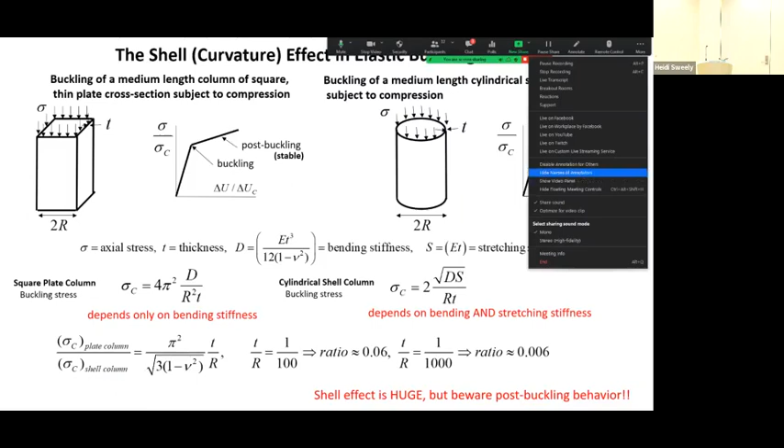I want to talk about the shell effect. These two examples show it: on the left is a square column constructed of thin plates. This talk is all about elastic buckling. On the right is a cylindrical shell with the same width, diameter of 2R, and the same thickness as that square column cross-section. They're both subject to axial compression, and for the purposes of discussion, imagine they're both clamped at both ends.

We're not talking about Euler buckling here. This would be typical of a shell with an aspect ratio of length to width like you see in those examples.

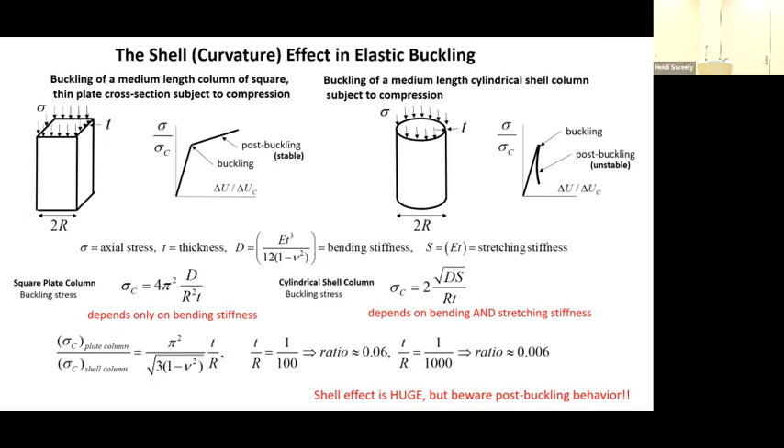If you look below the square column, the analytic formula for a perfect square column gives the stress at buckling, and it involves the radius to thickness ratio, but only the bending stiffness. Buckling in plates, at least at the onset, involves only bending. D is the classic bending stiffness of a plate or shell of thickness T, and nu is Poisson's ratio.

On the right-hand side, the corresponding formula for essentially the same sized column, but cylindrical, involves both the bending stiffness and the stretching stiffness.

The key point is that buckling in a shell—and this is the essence of the shell effect for buckling—can't take place without both bending and stretching.

As everybody knows, I will demonstrate this—even I can do these kind of experiments. A thin plate or shell is very easy to bend, but amazingly stiff in stretching.

So the shell effect is the fact that buckling can't take place without both bending and stretching coupled together. If you look at the bottom of the slide on the left, you see the ratio of the plate column stress at buckling to that of the shell, given by that simple formula. It involves only the thickness to radius ratio.

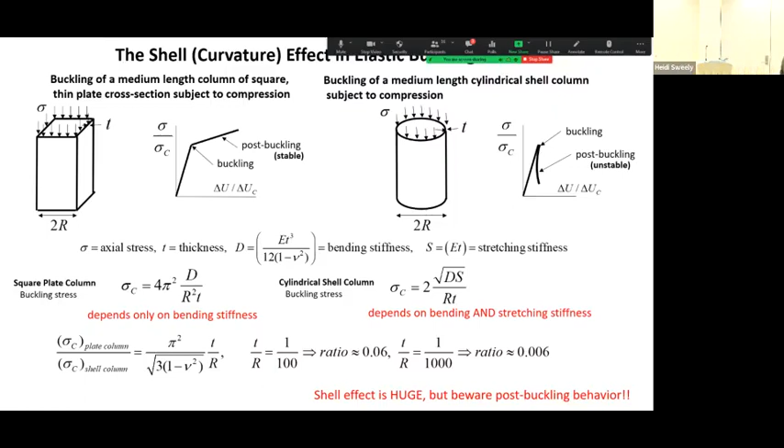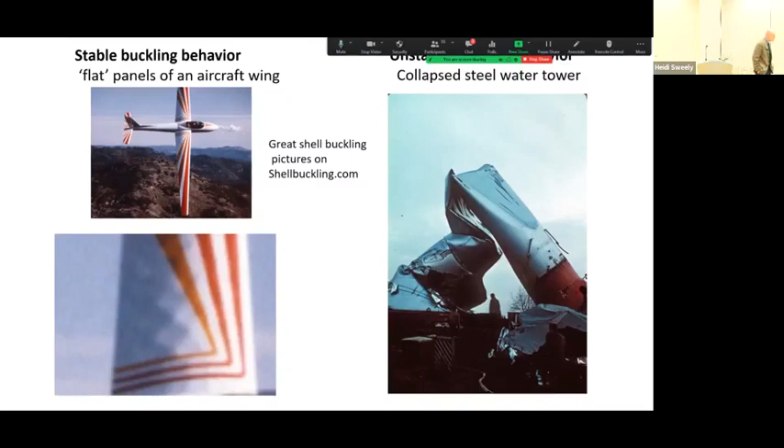In fact, the old metal airplanes, I think maybe even back to DC-3s, were designed to fly under certain conditions with buckled skins because it allowed for more load carrying capacity. For aerodynamic reasons, that's not allowed anymore. The structure on the right—I don't need to say anything about it—is a water tower that buckled and just immediately collapsed. You're going to see other examples of this.

I couldn't resist including this very nice experimental paper by Marc Meyers and some of his students at UCSD.

They tested various eggs, from a quail egg up to an ostrich egg. Notice that for a typical chicken egg in this test, these are loaded in axial compression, but carefully without concentrated loads, distributing the load instead. So that's actually an axial load. You can see that a typical chicken egg can take about 1,000 newtons, in other words, more than 200 pounds.

You can try this yourself. If you take an egg in your hand, I suggest making sure you don't have a good suit on, and squeeze it. As long as you don't press too hard on one spot, you can't break the egg. By the way, they repeated these tests for eggs with the interior evacuated, and there's a little difference, but not much.

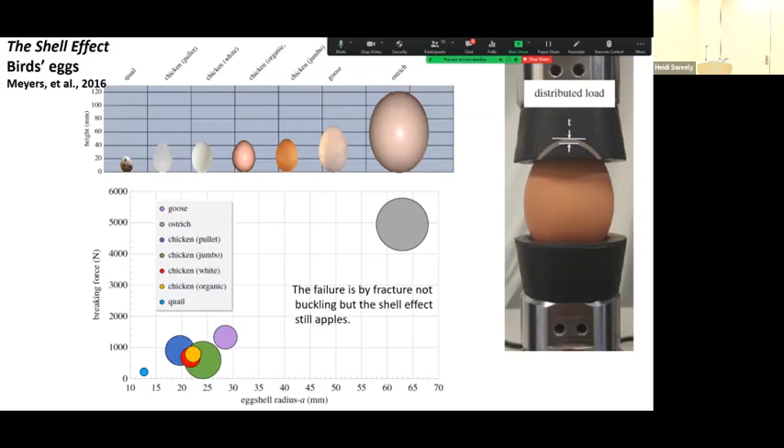Now, I should hasten to say these eggs do not fail under this loading by buckling, but they're taking this load, they actually fail by a compressive failure mode. But again, that is the shell effect. If chickens laid square or cubic eggs, they wouldn't work so well.

Okay, let's get down to work. There's going to be a little history here. For those of you unaware of this, back in the 60s, when NASA was working flat out on shell structures, they collected data, and this is just for cylindrical shells under axial compression.

By the way, this is all elastic buckling data. They collected data for design purposes, and the key thing this data brings out is the key thing about this unstable buckling behavior of shells.

So let's start with that data plot. On the horizontal axis is the radius of the shell divided by the shell wall thickness. Thin shells often have R to T ratios of over 1,000, but that data goes down to R over T of a bit less than 100. The material has to have a pretty high yield strain if it's going to buckle elastically at an R over T of 100, but these shells have.

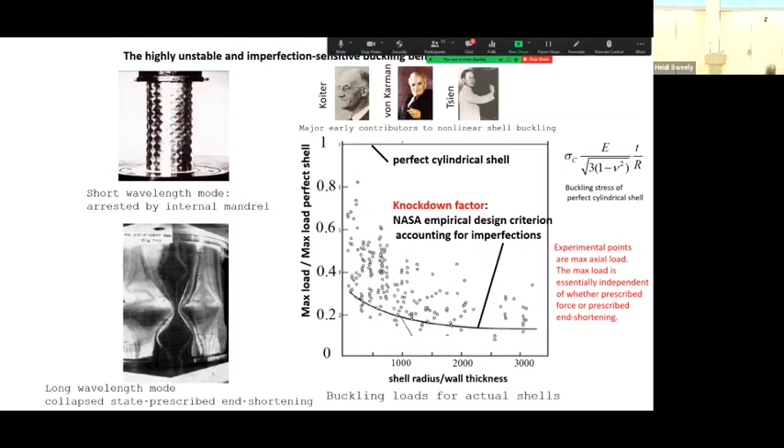But the thing to take notice of here is that some of these shells were manufactured so carefully—a few of them, even way back, there was a group at Stanford that did electroplating of shells on very carefully machined wax subsurface. They electroplated these shells, polished them, and then melted out the wax. They could make very accurate shells, and you can see some of them buckled up close to the classical value, but still enormous scatter. As I say, still today for unstiffened spherical or hemispherical shells, we still use that factor of 0.2 knockdown.

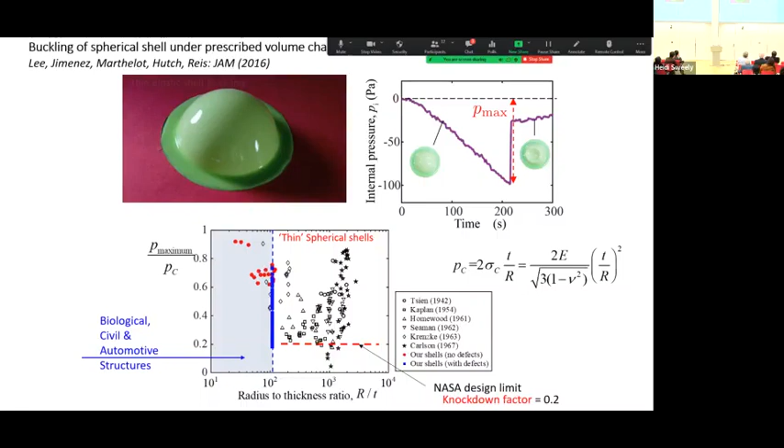Another point before we move on: most of my talk is going to feature spherical shells, but not entirely. There's tremendous interest now, which was not the case in the 60s and 70s, in the life sciences and soft materials area. The coronavirus is a spherical shell, radius on the order of tens of nanometers. There's lots of interest in chromosomes, colloidosomes—they come out to be nice spherical shells. They buckle. There are other examples.

By the way, in the late 70s I did consulting work for General Dynamics on a tank for one of these liquid natural gas tankers, which are very much in the news these days for obvious reasons. You've probably seen these ships—they typically have 4 or 5 of these gigantic spherical tanks. They're made out of aluminum, and that's because, for the material scientists in the crowd, it's a cryogenic cargo—you don't want to use steel.

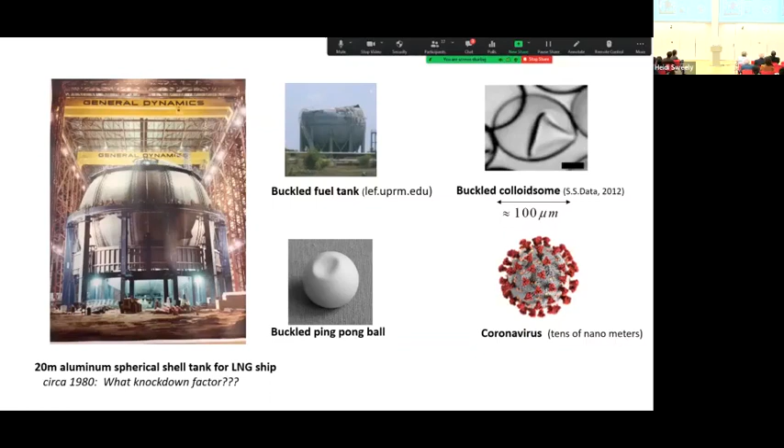It's not obvious, but the reason I was a consultant is that the thickness of the shell has to be designed so that it doesn't buckle. So the question is, for this type of loading, what was the knockdown factor? That's the role I played in coming up with one.

Okay, so here's the way my talk's going to play out from here on. I'm going to spend a little time talking about the way we analyze—I'm not going to do any details, but what has come out recently about very accurate analyses, most of it numerical. I'm going to drive home this issue of buckling under, for spheres, prescribed volume change or prescribed pressure, because that's part of the picture. I'm going to talk about imperfections, imperfection sensitivity, and computing knockdown factors.

Very recently, and here's where some of the younger people are going to be featured, I'm going to talk about energy barriers and probing methods for experimentally understanding elastic stability. And then finally, I'm going to talk about some things that really could also fall in the area of nonlinear dynamics. I know you guys have a number of nonlinear dynamics experts here.

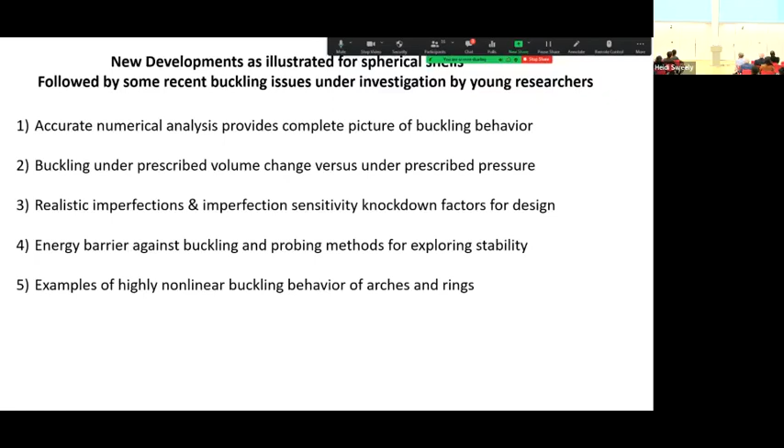Okay, let me start with this. I don't want to dwell on any of this at length, but I'll just mention and give you an idea.

One of the things we could not do in the 60s—remember finite element methods were in the beginnings, and certainly for nonlinear shell analysis, finite element methods were just starting to emerge. Even for nonlinear ODEs, the finite difference methods people were using could not do this kind of thing, at least not well.

What you see here is the result of a shell theory that uses exact bending and stretching measures. It is small strain, so it's linear elasticity for the material part—the strains are small in these problems, it may not be obvious, but they are. What makes this nice and easy is that for spherical shells, most of the nonlinear behavior can be captured quite accurately, at least qualitatively, by looking at axisymmetric behavior. So for these results we don't need PDEs, we're dealing with ODEs, and everybody who works with numerical analysis knows there are very powerful algorithms for solving nonlinear ODEs for problems like these. I use IMSL, but it's just one of many softwares.

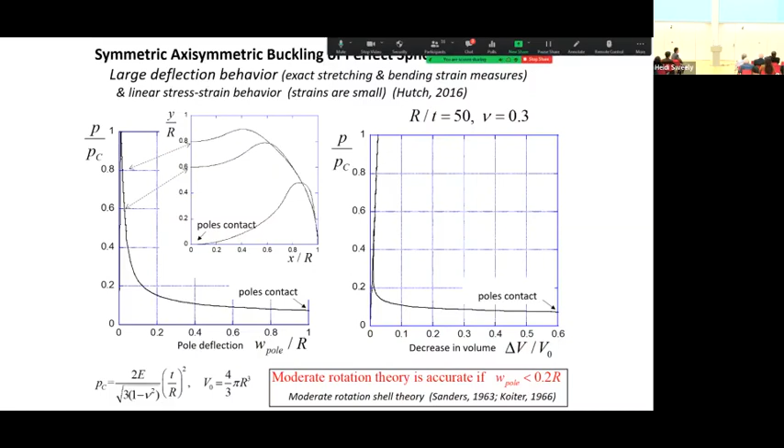That's way beyond anything we're interested in, but this demonstrates just how incredibly nonlinear the post-buckling behavior of these shells is. It also tells us—it's not obvious on this slide—that if you use the shell theory called moderate rotation shell theory, developed by Sanders and Koiter in the 60s, it is very accurate for pole deflections less than about 20% of the radius, for all values of R and T.

Okay, let's do this—I'm going to show you this picture again, but before I do, let me tell you what we're seeing. As I said, this is prescribed volume. The Reis group uses a syringe. By the way, these shells are only about this big—this particular shell has a radius-to-thickness ratio of 79, they're only about that size. Through the bottom, they remove water with a syringe, so they're controlling the volume.

So what we're going to see is we go up to point A—that's where it buckles. This was a nearly perfect shell, buckling at 80% of the classical value. Because the volume is prescribed, it snaps at the same volume down to B. Then, as I mentioned earlier, they continue removing water and it goes out along this stable post-buckling curve, down below 20% of the load-carrying capacity of the perfect shell. They go way out here, and then they bring it back—it gets back to point D, and then it snaps back to the perfect state. So let's do that once more.

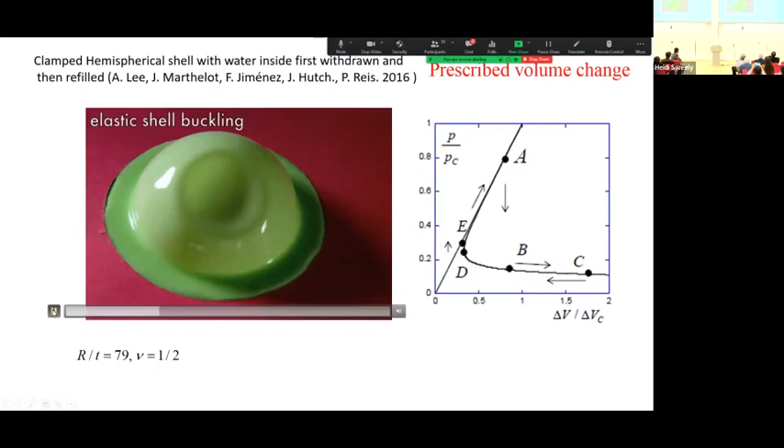One thing you may ask: how can it buckle under constant volume with a dimple? Because that's going to decrease the volume. The reason is that going along with this is that the pressure drops dramatically, by a huge amount. That means the shell, which has deformed elastically, allows all the other part of the shell to expand outward. So the volume you lose from the dimple is replaced by the expansion of the shell that way.

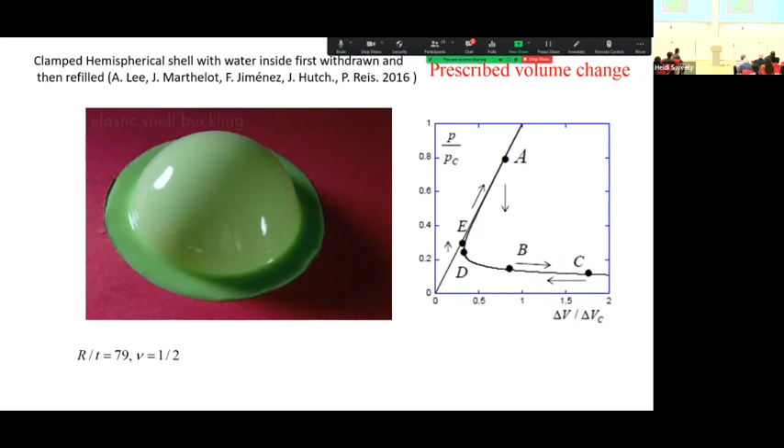Now let me show you what happens. By the way, Joel Marthelot, he was in the group. He did this especially for this lecture for me at my request, just a week ago.

So this is under prescribed pressure, right? And what does it do, think about it. Again, it's the same shell. We get up to A, it buckles. The pressure is held constant. Where can it go? Well, let's look.

This is equivalent to when you stand on a beer can and it buckles. And as you know, when it buckles, it just flattens.

These are elastic, so they spring back, and you can test them over and over, which they've done.

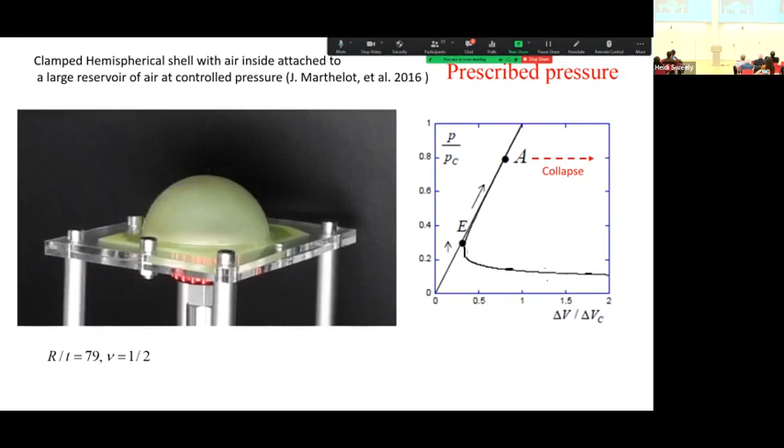Just let you read this. This is a beautiful test. Just so you know, this is a tank car with about more than a centimeter thick steel.

And I'll tell you how it's loaded after you see it.

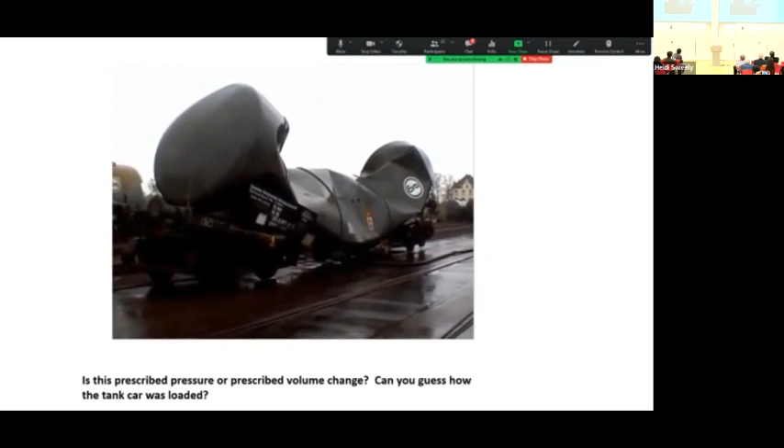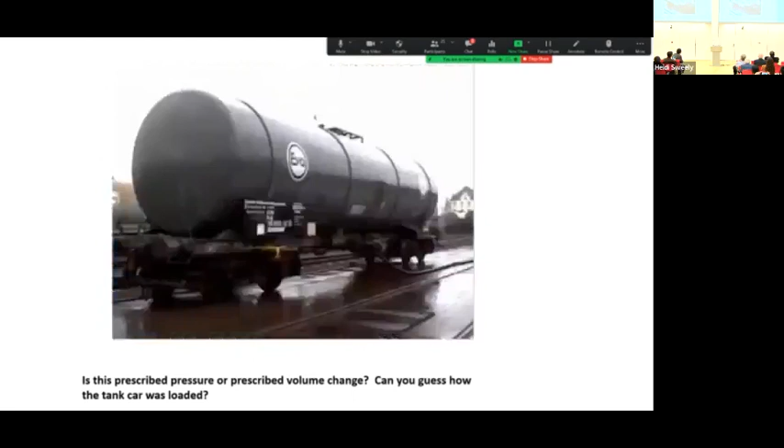What they've done there was done deliberately, but this is real. This is under prescribed pressure. What they've done is they filled the tank car with water and sealed all the valves. Normally when you evacuate a tank, you have to open a valve at the top or you're asking for trouble. They don't do that. And I don't know if you noticed, but there's a hose at the bottom, so the water is drained out from the bottom. I'll just state as a fact, even though this is a half-inch or almost half-inch thick steel shell, it buckles at about half an atmospheric pressure.

So by the time the water in that tank is about half down, boom, catastrophic. I'll just remark that the cylindrical shell under hydrostatic pressure is not as catastrophic as the cylindrical shell under axial compression.

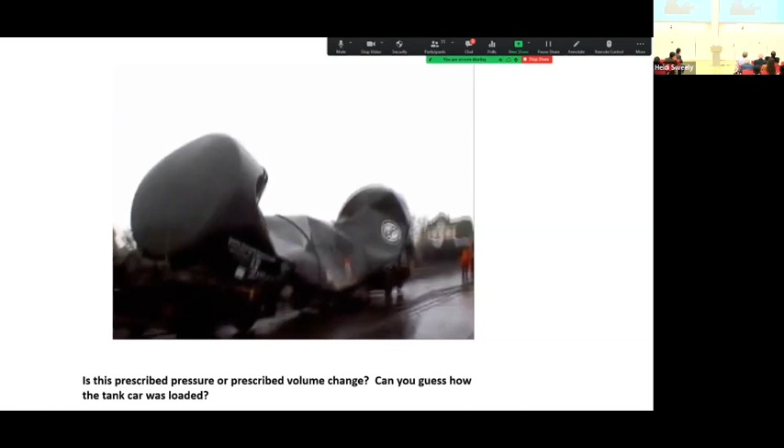Okay, you know, I'm not going to spend time on this, but Stu Antman's here, so I'll let him just look at that for a second. So the thing, again, that was not possible in the 60s, I want to make the point.

Koiter, he was my hero in mechanics, a Dutchman. He wrote basically his last important paper, a 100-page paper on the buckling of spherical shells. It's a real tour de force, but there were so many things he could not do because he was working only analytically.

But with numerical methods, with great accuracy, you can ask all kinds of questions and get all kinds of results. I'm not going to dwell on it, but one of the interesting things is that this shows that as soon as, and this is what the analysis - a graduate student who's good at numerical analysis, once he gets the equations right, can do these calculations.

But what this shows is that as soon as the shell starts to buckle, this is the classical mode at the bottom here, derived by a Swiss, I think, named Zoelly in 1915. As soon as it starts to buckle, that shape gets lost and it becomes a localization problem - the buckling localizes to the pole, immediately. It's amazing how abrupt that process is.

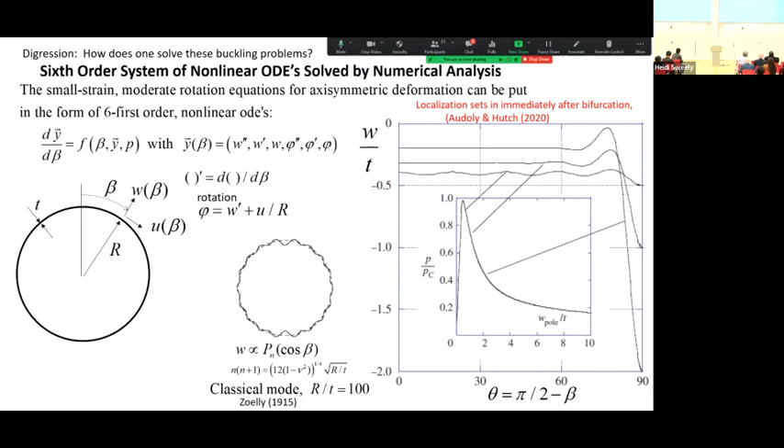I'll say no more. But I will say a little bit about the results of our analysis when we include imperfections. This was done once I teamed up with Pedro Reis and his group, done to make connection with their experiments.

This is quite a realistic imperfection. It's axisymmetric, located at the pole, and as you can see, it's a Gaussian-shaped dimple. Delta is the imperfection. So I should say something.

And there's a lot of history of this. But the worst imperfections for these types of unstiffened shells is slight undulations of the geometry, of the middle surface geometry.

And the amplitude of this imperfection is delta. And you'll see here calculations for, first of all, the perfect shell, but for 3 other imperfections. The largest one, which is just 1 thickness out of roundness at the top. So for a thin shell, you probably wouldn't even recognize by eye a 1 thickness imperfection. You certainly wouldn't recognize one that's a 1/10 or a 1/4.

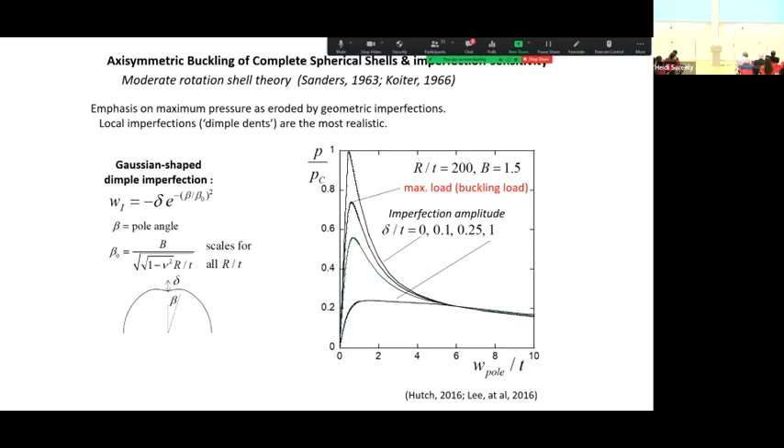But notice that here's the quarter right here. Notice the quarter of a thickness imperfection reduces the buckling load to almost 50%. And when they're down on the order of 1 thickness, they're down to that 0.2 ratio.

Here's the same results, but plotted as the buckling pressure, the maximum pressure that this shell in the presence of the imperfection can carry. This is the imperfection amplitude divided by the shell thickness. And I didn't mention, and it's not obvious why this is, but these results normalized this way are independent of the shell thickness. And so lo and behold, you see that what emerges here is this plateau at just about 20% of the classical pressure. And even for quite big imperfections, it doesn't get below that.

Now, the Reis group, and I'm doing them no justice because they really developed this absolutely terrific way of manufacturing very precise elastomer shells. And they build in precise imperfections of these shapes.

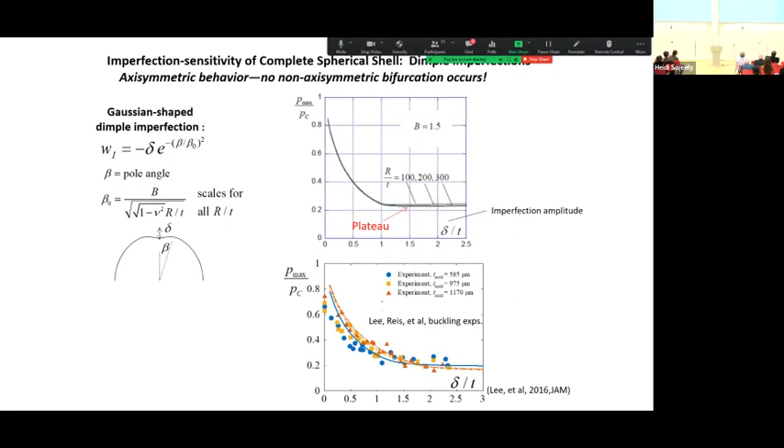And here's their experimental data, different R/T values. Here's their experimental data plotted against the built-in imperfection amplitude. And I have to say that this is unquestionably, in my mind, certainly for spherical shells, but I think for any shell, the most systematic imperfection sensitivity data that anybody's generated. So this is one of these new developments.

Okay, now I'm a structures guy. That ought to be clear. And certainly when we were all working on shells back in the 60s, we were mainly concerned with the maximum load carrying capacity, the buckling load. And for structures people, I'm going to say some other things about other interests in buckling in a moment. But for structures people, that is still the main motivation.

And there's a big effort underway. It's been going on for more than 5 years at NASA. It's led by Mark Hillburger. And by the way, similar activities are going on in the European Space Agency and in the Chinese Space Agency. In fact, I would say there's more activity, certainly on the theoretical side, in Europe than there is in the US. But here's what NASA is doing.

Let me start off by saying the codes that we have, Abaqus, ANSYS, the structural codes, if you put in the right imperfections, an accurate representation of the imperfection, and other things like, these shells are often segmented, so you need to put in how they're joined and that kind of thing. That can also lead to imperfection. But if you put that in the codes, those codes will unquestionably give you results to better than 5%. So for engineering design purposes, those codes are great.

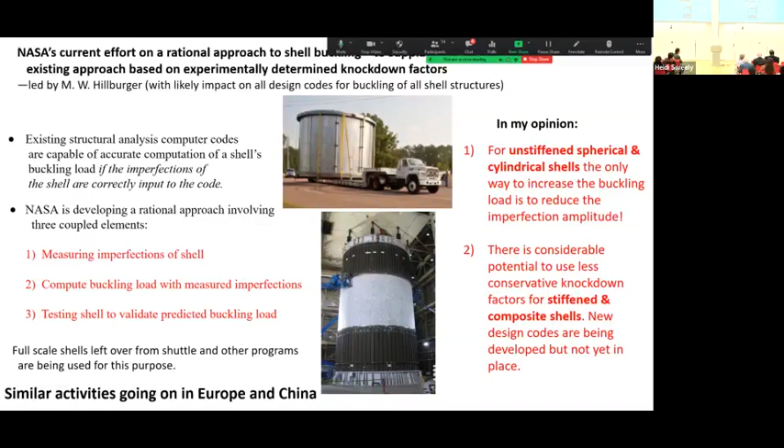Okay, so how are we doing? I'm getting there. There are two new things coming up. There's...

For a shell that's loaded up to a point below its buckling load, there's an inherent energy barrier, which we can compute, between the shell at that load and for it to buckle. And one of the ways to assess that is to use probing.

So here's a very nice, extensive series of tests using thousands of Coke cans that's been done. These were colleagues of mine at Harvard. And here's just one example.

I want to go through this plot. So here is a Coke can. By the way, Coke cans buckle elastically. Of course, once they snap, they go plastic, but before they snap, they're elastic. A typical Coke can, when you test it, buckles at about 30% of the classical value for a perfect shell, for a typical shell of their radius to thickness.

So look at this. Here's a load applied to the can. By the way, this is prescribed end shortening, not prescribed load, but that's the load associated with that end shortening of 136 Newtons. And it's probed laterally. Look at the probe forces we're talking about—only measured in Newtons.

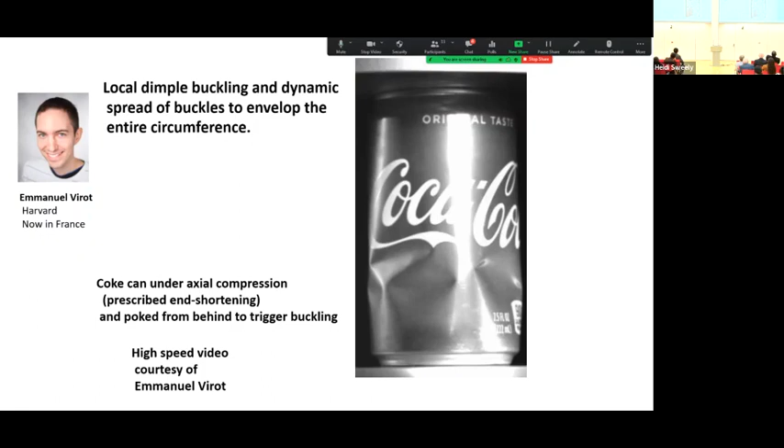Some people can. Okay, here I'll make this quick. This is very nice experimental work by Joel Marthelot.

Let's just start. This is a hemispherical shell under prescribed pressure, below the buckling pressure—this is schematic. The energy barrier under this type of loading is the work done by the pressure through the change in volume, and that's the energy barrier to buckling.

The difference between the energy in the unbuckled state and the buckled state—an unstable buckled state—at the same pressure, that's just schematic, but is that amount.

So this can be computed accurately, particularly for these axisymmetric deformations. We've done that, and Joel did the experiments where, once it's loaded in pressure—this was prescribed pressure—he then probes it until it fails, and he measures the work he has to do to get it to buckle.

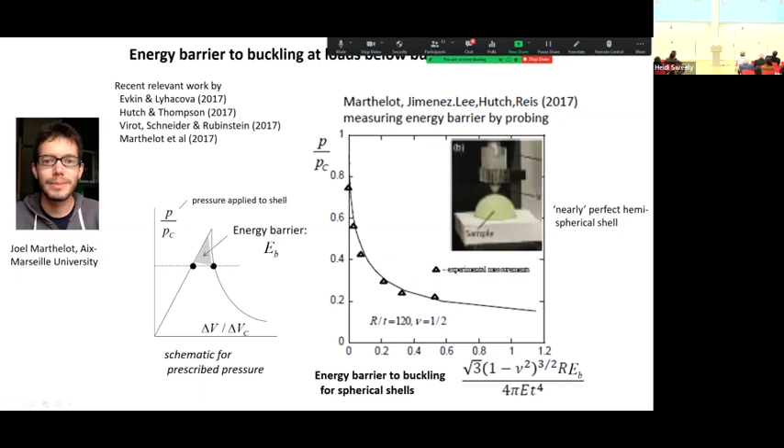That's actually an upper bound to the energy barrier, but it turns out for this configuration that is essentially the energy barrier. And there's remarkably good agreement between theory and experiment.

There's a young guy, graduated from Caltech, working with Sergio Pellegrino and JP—this is JPL work too. This is Fabian, by the way, who's soon going to be starting as an assistant professor in aero at Cornell. Their group designs these collapsible structures meant to go in space.

The spars on either side are coilable, sort of like a measuring tape. So this whole monster structure is rolled up into a thin tube, and in space, I don't know exactly how they do it, but it's released and it just unfolds all by itself, releasing the stored elastic energy.

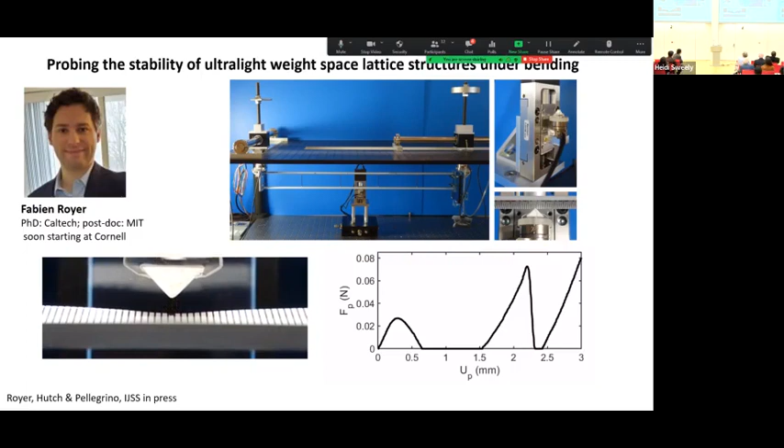On the right there's the deflection of the probe. I didn't show you this, but you see a snap, and now it's picking up load again. What happened there is you first see snapping under the load, and then as the punch engages again, you see more snapping, but that's occurring to the side, and you didn't see that. They use this probe, and they probe it all over.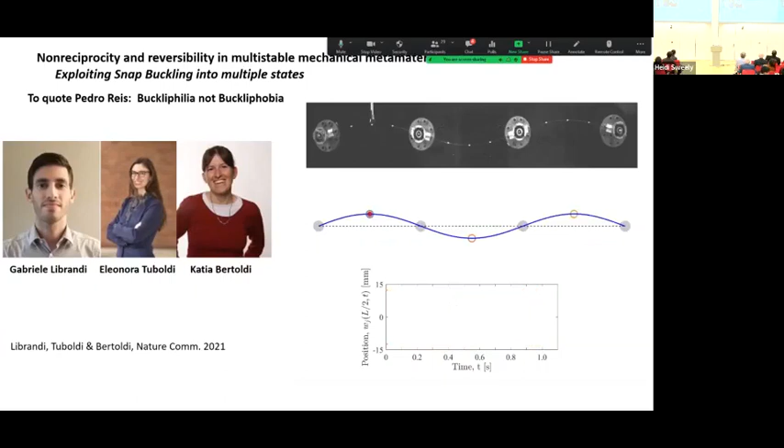Okay, my last slide, I'm running a tiny bit over, sorry. I'm going to start with something I saw for the first time in my life two weeks ago, demonstrated to me by Renee Zhao, who gave me this ring. I was mentioning to Stu Antman, who made basic contributions many years ago to what's called Kirchhoff rod theory, which governs a structure like this. Kirchhoff, incidentally, did his work around 1859.

Okay, anyway it doesn't bother me. I even love Euler's work. Anyway, I'm just showing you this effect.

So I'm simply twisting this in opposite directions, and lo and behold, it snaps. I was still holding it, so you didn't see the snap, but it snaps into 3 rings. Now, why 3 rings? I wish I had a very good mathematical sense of that. I don't, so I've been thinking about this ever since Renee showed me this.

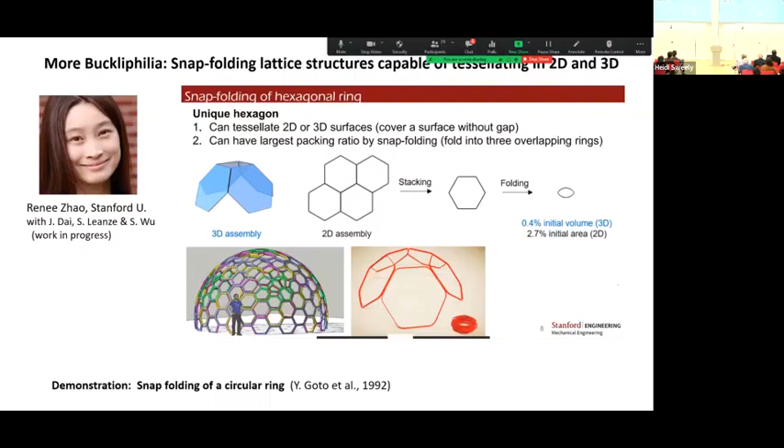Units like this can be folded into something that looks like this, and similarly these type structures can be folded into something like this. It's folded into a stable configuration, and then given that you properly deactivate it, it snaps into a structure. So these are structures, or materials, designed to snap from one state to another. Obviously for certain applications, this is very useful stuff.

Okay, I'm sorry I went over by a few minutes, but quickly - for shell structures, we are going to have to figure out a way to deal with imperfections. And if we want to take advantage of the computer codes, we're going to have to put in realistic imperfections, either measured or using the imperfection level to set tolerance for manufacturing of shell structures.

As I indicated, this notion of the energy barrier is relatively recent. It actually goes back a long way, but to actually compute it is recent, and its implications aren't well understood. And certainly probing, which is a new idea, has lots of potential, but it needs a lot more work. And then, as I've indicated, there's so much going on, both in the soft materials area, the life sciences, and in nonlinear material behavior to exploit the nonlinear instability behavior of materials as a buckling phenomena. Thank you.

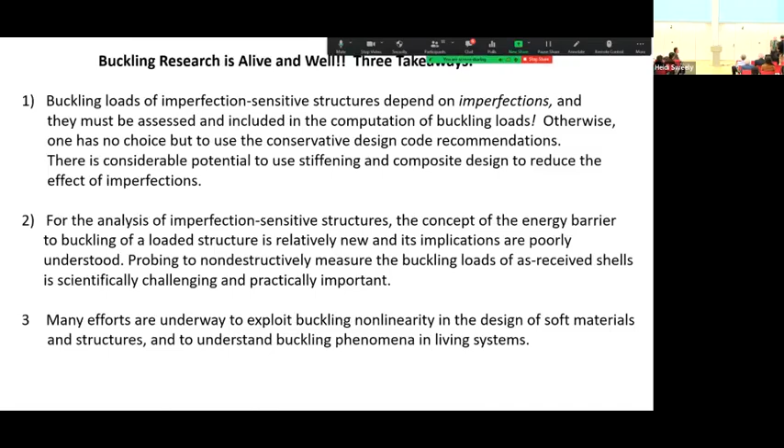I really appreciated being invited. Yeah, Jason, you want to come? Yeah.